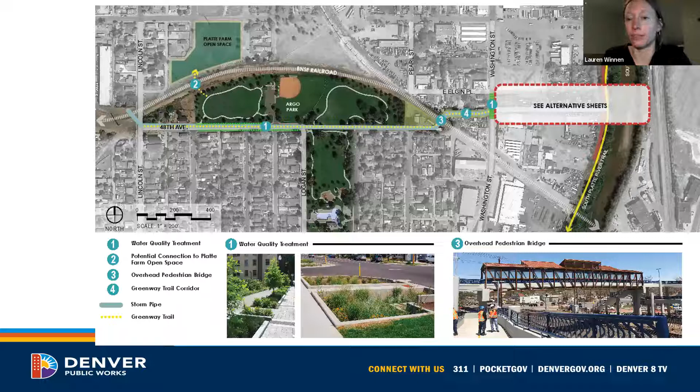Jessica, Joe, Mark, Angela, Barbara, Kyle - any questions, comments on this part of it? You all are quiet tonight.

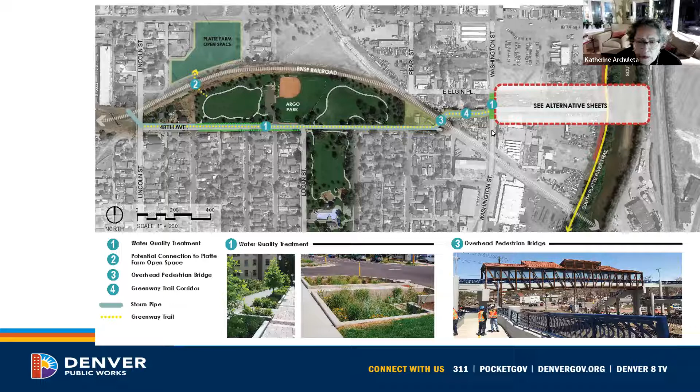Oh, Ken's asking, is there a way to have the trail run straight across Washington instead of jogging north? Might make it a little easier for bikes to get across Washington, rather than - so further south, you're saying closer to this 10-foot, where this 10-foot trail is shown, versus Elgin?

Yeah, he says exactly. I think we can look into that. I think that'll depend - my area of expertise is the storm sewer system, and I'm not as much up on the pedestrian traffic parts. So our traffic group and traffic engineers will have to decide if that crossing down here would be something that is okay. But I would think they probably need to have it closer to 48th, just for safety purposes.

I think that this connection with this trail, the signalization or not of this intersection, and this crossing as well as this trail, is all the next thing - to figure out where does that tie in best. How do we make that work?

Good point, thanks Dan. This is not necessarily going to be a signal - that's kind of still not determined, to be determined. But yeah, you're right, it does kind of make you go north and then back down south. We'll look into that.

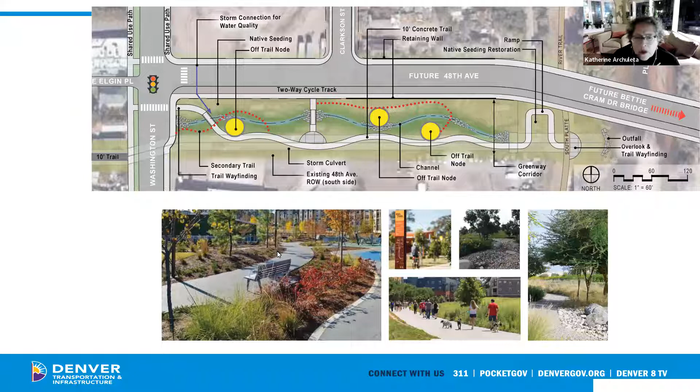Okay, we're going to jump into one of my favorites, the Globeville Levee at Ringsby Court. I'm always interested in the new news around this one. Correction - the Sheep Bridge is not being restored, it's being preserved as an interpretive artifact, where the sheep crossed.

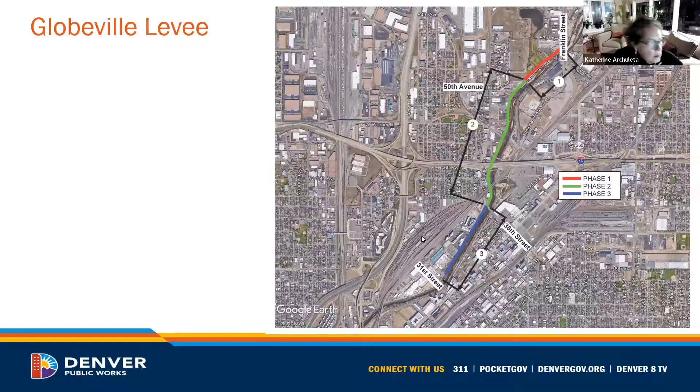Great, I'm going to turn it over to Cody to talk about this. Thanks, Kelly. I'm Cody Porter with Wilson and Company, the project manager on the design team for the levee project. We're going to focus on the Ringsby Court phase 3 region of the levee.

What you see on screen now is 38th and Ringsby Court. To orient you, north is actually down, so we're looking south along Ringsby Court - that cursor is marking 38th where it crosses the river. This is the existing conditions. Many of you are aware there's a fair amount of redevelopment happening along Ringsby Court in the RiNo area, and that's expected to continue. Note there's no trail or sidewalk on the river side along this whole reach. On the north side, at the bottom of the left photo, there's a social trail that's formed, leading up to the regional trail north of here and the pedestrian bridge across the river.

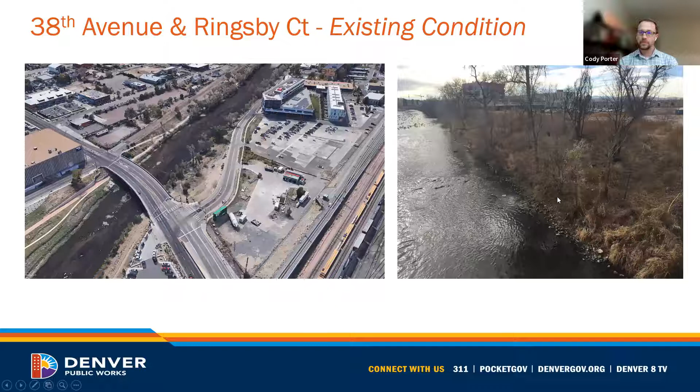Okay, so we're going to do a very similar look here to talk about some of the amenities we're considering, including with the project. Like Kelly said, first and foremost, this is really focused on the flood control aspect of the project, so that kind of takes priority. But just to share some of the ideas we're looking at feasibility-wise from technically, as well as the budget and cost of these improvements.

So again, very similar image to what we saw on the previous slide on the left with this oblique imagery. What you'll notice is we are now trying to bring a sidewalk up along Ringsby to meet 38th Street on the south, as well as formalize that social trail connection on the north side of Ringsby.

This is pretty great, right? So the other piece of this is we're looking at an underpass trail system or connection through here under the bridge. There are some pretty hefty complications with this, involving some pretty large, expensive walls and things, and so we're looking at that, as well as of course the hydraulic impact to the river as part of that.

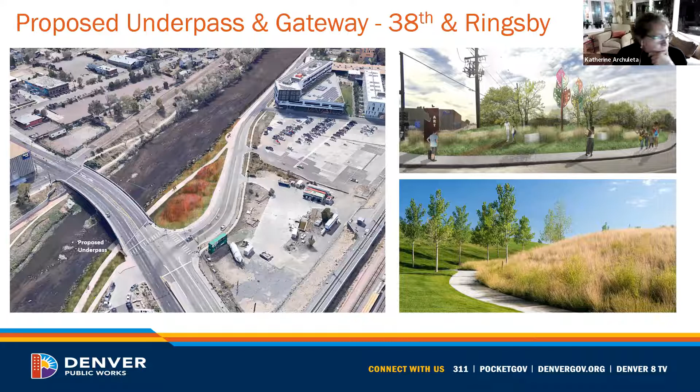So as we look at adding the levee, we've looked at what we can do to this street. Like Maria was saying, it's very narrow, so it's tricky. But Cody, feel free to jump in - this is all lay terms. In this segment of the levee, it's actually a wall, not a big earthen mound.

So what we've looked at doing is pushing that wall out a little bit further into the edge of the river to get ourselves more space on Ringsby. And if we can do that, which Cody says we can, we can buy ourselves a little more room. So we still have two 11-foot travel lanes for cars, but also enough space to get a 10-foot walkway for pedestrians.

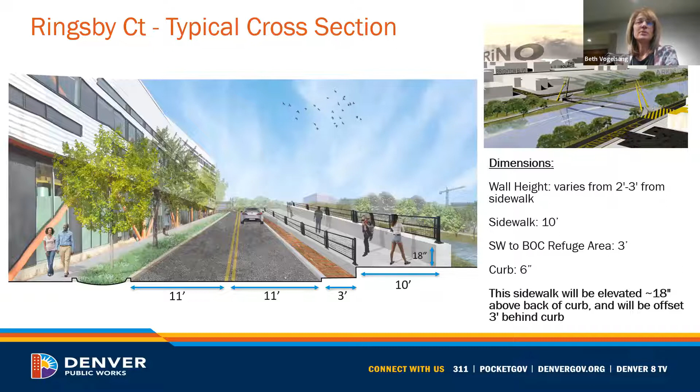What'd you think about the railings? Simple, more complicated—are there particular things you think the railings should enhance or not deter, or any particular leaning either way? This is all in the eye of the beholder, so there's no right or wrong here. You guys are agnostic on this one? You don't have to pick anything.

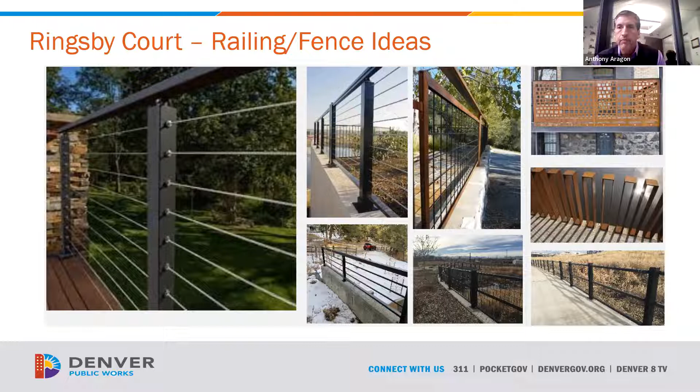Okay, great, thank you—things to think about. So the feedback we're getting is that the more lighting, the better. I think Rob is lit up like it's the surface of the sun. And solar lighting, hopefully. And AE likes the very relaxing lighting that creates curves. I do too—I think a lot of those lighting features across the bottom are soft but well lit, and they make that space a lot more comfortable, or could.

I think for many people that area has been so wild in terms of its vegetation that it's often hard to imagine what the possibilities could be, where it becomes more pedestrian friendly. You begin to imagine both green space and other amenities could really make a difference and make it a place where people can enjoy the river.

All right, does anybody else have anything else or other things you'd like us to think about as we move forward? Just to be sure that we consider not only pedestrians, but also cyclists and scooter riders as we think about lighting. Thanks, Kat, that's a great idea.

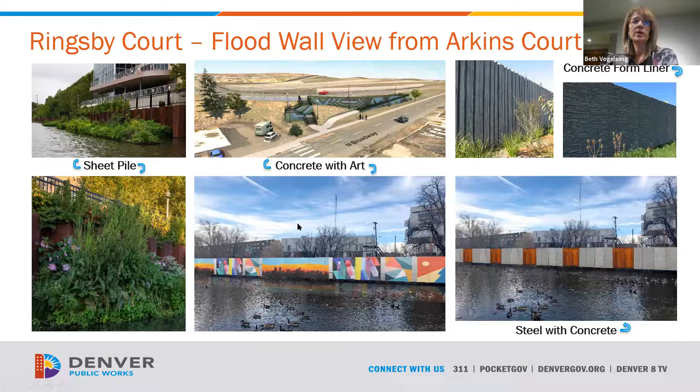Okay, all right, so we are just about done. I want to get you to the end of the street - okay, so that was our promenade.

So this is all the way down at 31st. This is Ringsby the whole way right to the north, and we just made our way all the way along. And the levee wall, Cody - feel free to jump in - but it kind of comes to its conclusion here right as it approaches 31st.

Right, so the wall is going to run along Ringsby, but like Beth said, it'll terminate at some point. But in the name of connectivity and completing the picture here, we will continue that path, that trail, on the riverside of Ringsby all the way down here to 31st.

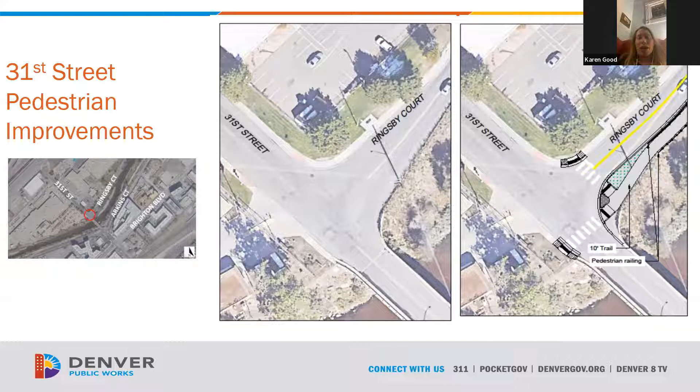Related to that parcel or that property. No, Anthony, great question. I did actually just ask about that earlier this week, and we don't have any updates, but thank you for asking. Things in the property world often change, so once we have more information, we'll certainly use this forum to share it, but at the moment we do not. Thank you, it's been on my mind as well, so thanks for asking. We'll be sure to get you that information as soon as we get it.

AE's statement is ditto to what Anthony Y is bringing up: a right turn lane onto Washington heading east on 47th should be in existing planning documents from prior neighborhood planning meetings. Very important concern. Catherine, can I add really quickly to that? One thing folks might want to do for something more immediate is to put in a PocketGov or 311 request to look into whether that could be changed prior to the reconstruction project.

Getting those comments into 311 and PocketGov do really make a difference. They can be helpful for our team working on Washington, because we can look at what the situation is now, whether it meets the requirements currently. If it doesn't, then our Washington team can look into what they can do in the longer term. It's all well and good that it's in a planning document, but we need the request now. My guess, and I haven't looked into this in detail recently, is that it did not meet the requirements at the time of the neighborhood plan. So that's when you want to wait a couple of years and ask, does it now? That would be a good thing to ask, and I hope that's helpful.

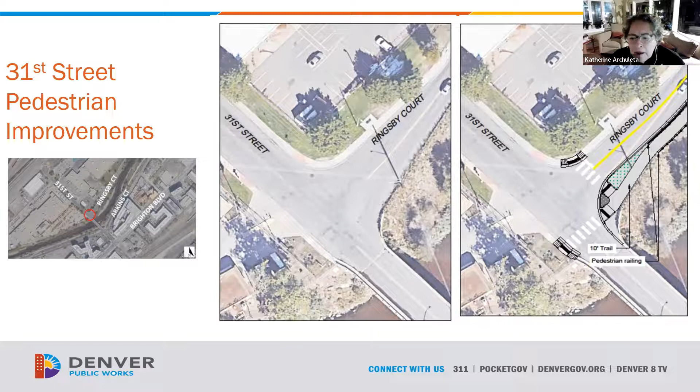You sure can. I just wanted to also mention, for those that may not know, Jessica is with Councilwoman CdeBaca's office. Jessica, did you have any announcements or updates you wanted to share?

Just thank you for being here tonight. I don't have anything. I am always just here to listen and see how the Councilwoman's office can be helpful to all of you, so please reach out if you have any questions or anything we can do to help.

Terrific, thank you so much. And a couple of announcements, which I will email to you as well. There's going to be an open house for the Swansea Recreation Center indoor pool on Thursday, March 3rd, from 4 to 7 p.m. at the Swansea Rec Center.

Again, I will make sure to email this information quickly, because their community open house is next Thursday, March 3rd, from 4 to 7 p.m. Anyone can drop in during those 3 hours, with free food and refreshments.

Additionally, I heard from Erica Martinez with the Denver Public Library. They are going to be hosting an open house on March 15th at the Holy Transfiguration of Christ Church. They haven't got the flyer together yet, but as soon as they do, I'll send that information as well.